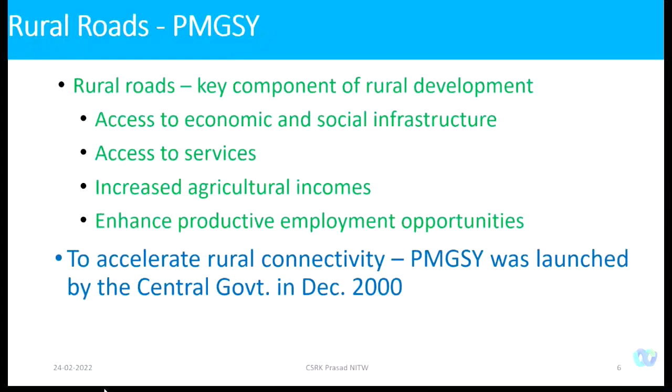They realized that if you want to develop the nation, you want to develop the rural areas or habitations where 70% of the population still live, then it's worth investing - economically, financially, or socially - in construction or strengthening of rural infrastructure. Roads are the primary infrastructure providing accessibility, connectivity, and mobility to people living in these rural areas. That is the reason they launched this scheme, PMGSY, Pradhan Mantri Gram Sadak Yojana, in December 2000, thanks to our late Prime Minister Sri Atal Bihari Vajpayee - it is his brainchild who launched this one. We are enjoying the fruits even after 22 years of launching this particular program.

This PMGSY program is focused on providing a proper engineering structure, because till 2000, even though rural roads were supposed to be an engineering structure, they were never treated as one. So as and when funds were available, small or fractional funds, they used to lay one layer of metal or gravel, and sometimes roll it, sometimes not. That was the fate of the village roads.

So they realized that the PMGSY has emphasized that rural roads are also civil engineering structures, which are supposed to be scientifically designed, and then constructed and maintained properly. So they also stress the quality and durability of these roads. The quality of construction should be good. That is much emphasized.

Probably you might realize that by this time, the three-tier quality control and assurance mechanism was not there in the other schemes of either the state or central governments. It's the first time under the PMGSY scheme that they introduced an excellent quality framework, that is a three-tier quality framework. All of you are familiar with that.

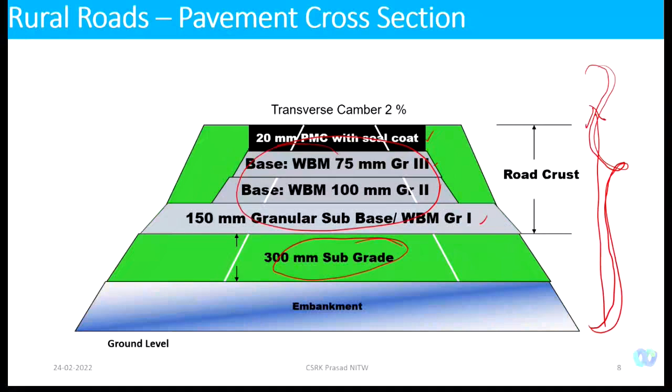You know that the Government of India has launched a scheme to provide a house for every citizen across the nation, villages, towns, etc. I think our Modi ji has said that by 2022 we want to have a house for each citizen. We have not yet realized this. Not only that, there are several construction and infrastructure projects where natural resources are required in huge quantity. Similarly, high volume roads, yes, we require them.

But can we find out alternative materials? Can we find alternative materials replacing aggregate, so that the dependency on good quality material will be reduced, along with the cost of construction?

I vaguely remember in 2001, when we were scrutinizing the DPRs in the first phase, first year of the launch of this particular program, it was roughly around 5 lakhs per kilometer, less than that. But now it's almost 80 lakhs, 1 crore, or in some states it's crossed more than 1 crore per kilometer. Cost of construction has become almost 20 times higher in 20 years. So where do you get the money?

Ours is a developing country. It's not cash rich or with excess surplus budget. So we have a huge demand across various sectors. We have to optimally utilize the resources available, and we should be able to reduce the cost of construction.

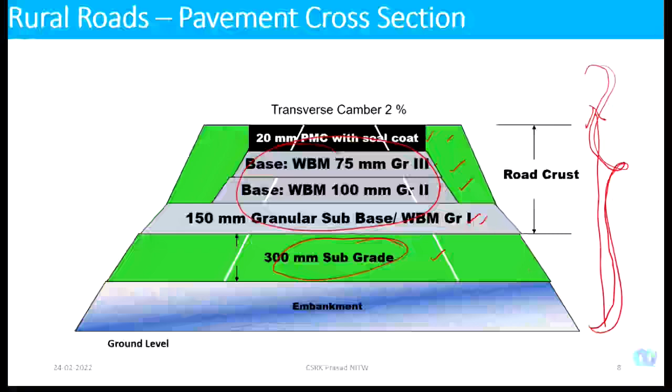In the subgrade, or the subbase course, or the WBM layers, or on the surface layers. So we have to test and evaluate each and every naturally available material or industrial byproduct, and assess whether they are suitable for the layers in which they can be adopted or implemented, so that multiple purposes are served. What are the purposes? One, the cost of construction comes down, saving natural aggregate or natural resources for future generations, and effectively utilizing the industrial byproducts. Otherwise, disposal is a big problem.

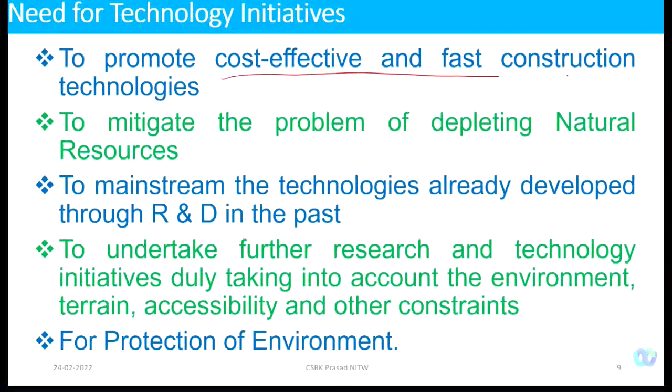So these are the multiple objectives with which this particular scheme was launched, encouraging the usage of new technologies, promoting cost-effective and fast construction technologies, and mitigating the problem of depleting natural resources. And then mainstreaming the technologies already developed through R&D labs like CRRI, CSIR labs, IITs, and NRRDA and so on, to undertake further research and technology initiatives, taking into account the environment, terrain, accessibility, and other constraints. India is a beautiful country.

From north to south, if you look at all our states and union territories, you have different terrain conditions, different environmental conditions, different cultures and customs. So we need to look at different local available materials, which are specific to a particular geographical location.

And ultimately, we have to protect the environment. You see in the last 20, 30 years how we have spoiled the environment. We, meaning I and you, all of us, are the main reasons for the depletion of the environment because of man-made activities, whether it's construction, traffic, vehicle manufacturing, or thermal power.

We are not in a position to drink tap water. We are not able to breathe properly. All our urban areas are being polluted. Two-thirds of the pollution in urban areas is due to traffic pollution. So there are several health hazards, whether it's high blood pressure, hypertension, diabetes, or even cancer. All these are due to pollution.

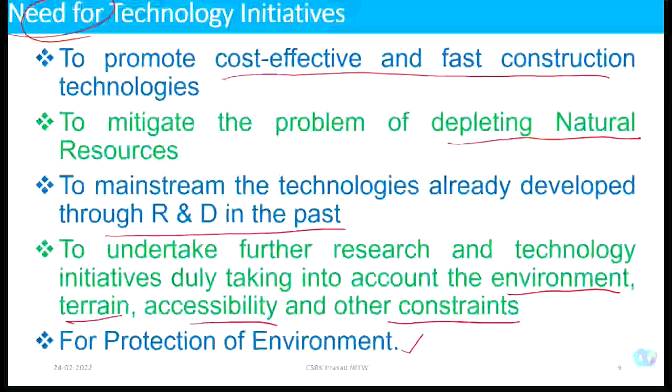So we need to look at reducing our contribution to air pollution drastically. These are all the reasons for us to adopt or look towards the adoption of new technologies. Now, if you want to use new technologies, what are the issues?

What are the issues in the use of new technologies? Maybe all these issues were more pertinent about 10 years back, but even then they are relevant even today to a certain degree, like the fear of failure of new technology and accountability. Many of our engineering friends working in the field are worried whether the new technology is a proven technology. It's not being applied, implemented, and its performance has not been evaluated. It's not well documented.

So if it fails, fellow engineers may say that his road has failed. And the seniors, the higher-ups, may also think that this fellow has not constructed the road properly. So this kind of social stigma will be there.

Then there are apprehensions among officers about rate analysis. This is another issue, though now slowly all states are trying to address it. Whenever we suggest engineers adopt new technology, they say that the standard unit rates are not available in SSRs. So slowly we are trying to address this unit rate analysis in the SSR across different states.

Similarly, there is inadequate technical know-how about various technologies. The know-how was not well disseminated about 10 years back. Now we are well versed. Several series of workshops are being organized by the technology providers as well as by NRIDA. I've seen that in the last 10 years, more workshops are being conducted to disseminate the knowledge.

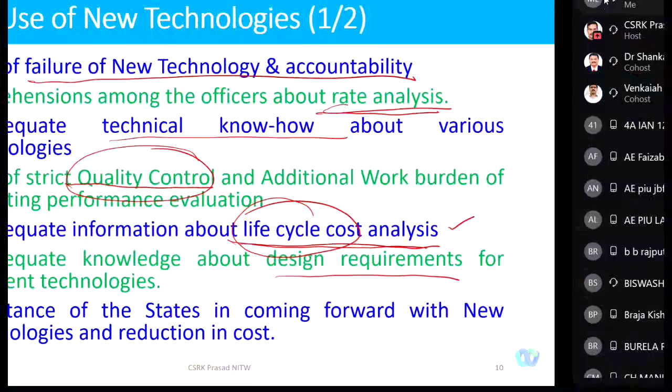One of my professors, Professor Ramamurthy, is going to address you tomorrow. He will say that we have to take about 70% of the performance in the laboratory may be reflected in the field. So what is that scaling factor?

For that, the technology providers should be able to share this information. In fact, as STAs and PTAs, many friends like me, my colleagues across the nation, are trying to convince the technology providers to share these design parameters. We're also finding it difficult.

Sometimes they're open and trying to share, sometimes they will try to shield the information. Okay, things are improving though. The reluctance of the states in coming forward with new technologies and reduction in cost is another issue.

The cost of road - I could see a rat race among our fellow engineers. If I say that as in charge of some X road, my cost of construction is about 50 lakhs per kilometer, the other colleague in the next division will also try to see that the cost estimation will be roughly around 50 lakhs per kilometer.

But that road may require only 30 lakhs. That road's soil subgrade might be good - you don't require that thickness, reduced thickness is good enough. And his road might not have a number of cross drainage structures. In my road, what I propose, there might be 3 or 4 cross drainage structures per kilometer, while in his road there might be just 1.

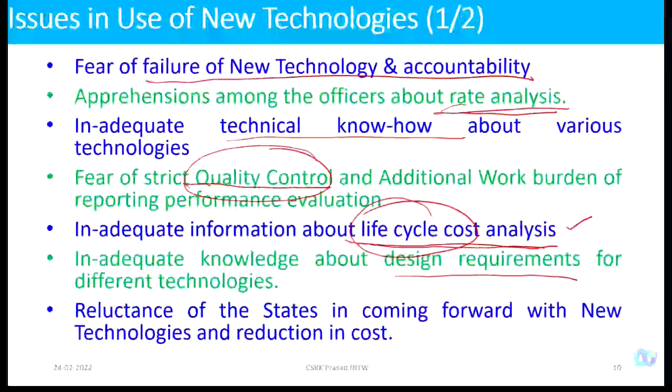In the name of new technologies, providers will try to enhance the cost of construction, and there's a claim about non-availability of standards and specifications for construction. But this is not true. In many cases, like proven technologies such as lime stabilization and cement stabilization, there is a well-established code of practice, which we will see subsequently. But for some technologies, yes, standards and specifications are not available. That's where our fraternity is trying to develop the specifications.

Lack of awareness by contractors is another issue we face in our country. Some of them are not professionals. You could see professional contractors on high volume roads, but these are all low volume roads, where the tendering value might be around 40, 50, 60 lakhs. You're unable to attract professional contractors. The less we speak, the better we understand the type of contractors we get for low volume road construction. Many times they don't know the ABC of construction. So we need to attract and upgrade the knowledge of these people.

Non-availability of indigenous equipment is another issue. Now slowly you can see agriculture tractors being effectively utilized in the construction of low volume roads, for pulverizing the soil, stabilization, mixing, etc. But the equipment problem, especially compaction, arises when widening roads from 3.75 meters to 5.5 meters intermediate lane, that's 1 meter on either side, developing a layer from subgrade level to surface level. That's where people face difficulties with compaction equipment, rollers, etc. Though now I've seen some smaller rollers in the market.

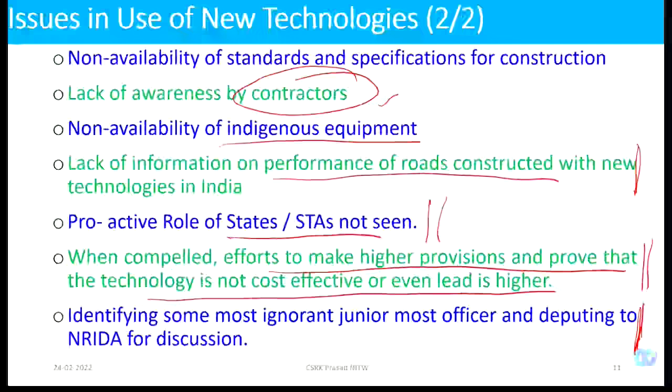When compelled, efforts are made to inflate provisions and prove that the technology is not cost effective, even when the lead is higher. This happens in very few cases, not all, maybe one or two. Then there's the practice of identifying some junior, less informed officer and deputing them to NRIDA for discussion. This is a point raised by NRIDA specifically, that for new technologies, the proper responsible officers are not being deputed. That's what they felt.

Having said that, with that background, what are the technologies we should focus on? The immediate focus is available marginal materials. There are several marginal materials across the nation in different states, and they are not one and the same. The marginal materials available here and there need not be the same. AP might have some kind of material, Telangana something else, Tamil Nadu, UP, different states have different types of marginal materials. Can we use them? Otherwise they are waste material. Can you use them?

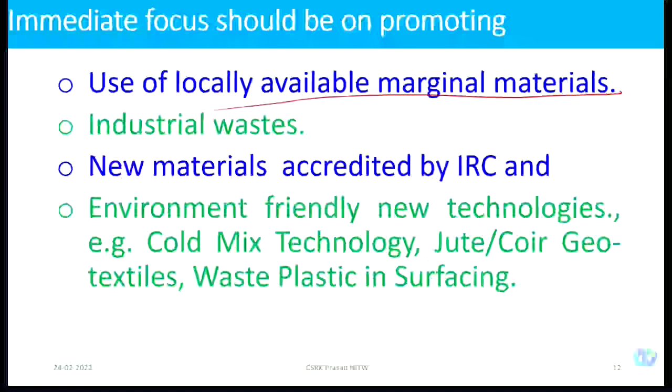Maybe can you use it as a subgrade, or by treating these marginal materials, can I improve the bearing strength and hence use it as a sub-base course? That's what we ought to look into. That's the reason civil engineers are a nature-friendly engineering discipline, because we want to adopt all types of materials and test their suitability. You cannot neglect or reject the materials; we have to find out where they can be used. Can I use it as a subgrade, sub-base course, or base course? By proper treatment, of course. The treatment might be necessary. With little intervention, probably you can enhance their qualities.

So the first priority is to utilize the marginal material so that you can save its quantity more. Then an equal quantity of aggregate or sub-base, other good soils that would be borrowed, can be avoided. Then there's industrial waste—thermal power plants, steel plants have a lot of byproducts in the name of fly ash, blast furnace slag, etc. Can I use them as construction material? Fly ash can be used in embankments, so that costly soil need not be borrowed from elsewhere. Or it can be used with cement, so that you don't lose strength characteristics and durability will increase, etc. These are similar new materials accredited by the IRC.

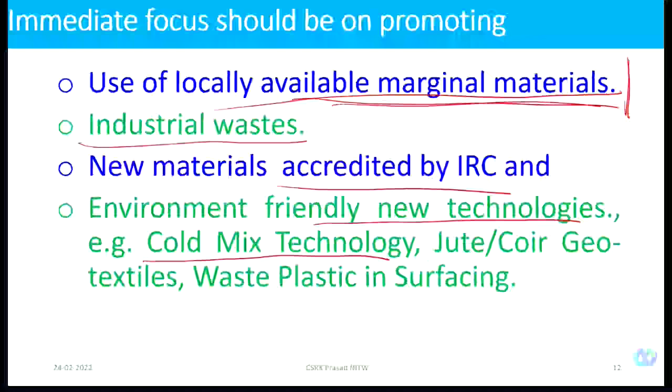So these are all our concerns—these are the ways you can focus on and adopt these technologies. These alternative materials can be broadly categorized, like an academic exercise: manufactured materials like cement and fibers, natural materials like coir and jute, waste materials like crumb rubber and waste plastic which can modify the properties of bitumen and improve the durability of bituminous mixes, and then industrial byproducts like fly ash and slag, which can also be utilized.

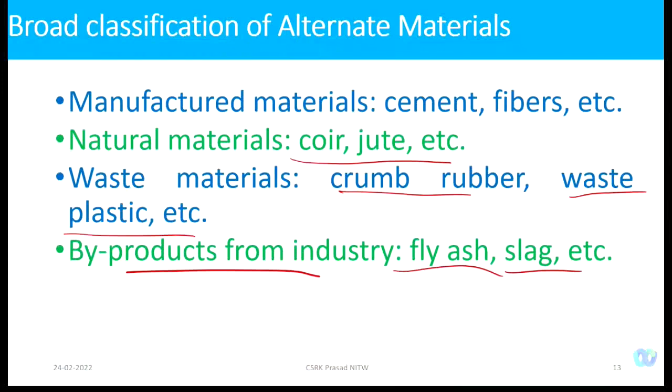Now let's try to look at some of the technologies which can be mainstream as suggested by NRIDA. It's a document. There are several proven technologies beyond doubt, whose performance has been evaluated, specifications are drafted, and codes of practices are being developed.

We call them proven technologies with Indian Roads Congress codes of practices or specifications. Like soil stabilization - lime stabilization, they have a good code of practice. Cement stabilization, bitumen stabilization, and mechanical stabilization. These stabilizations can be adopted in the field without any hesitation or doubt, because these technologies are already proven. How to use it, where to use it - step-by-step procedures to stabilize the soil or surface layers, whether using lime or cement.

All these things are well documented through the guidelines, codes of practices, or specification books like IRC. So these technologies, without any hesitation, all our engineering friends can use. There is nothing like failure of the road, nothing like failure of a particular layer where we are stabilizing it, because these are proven beyond doubt.

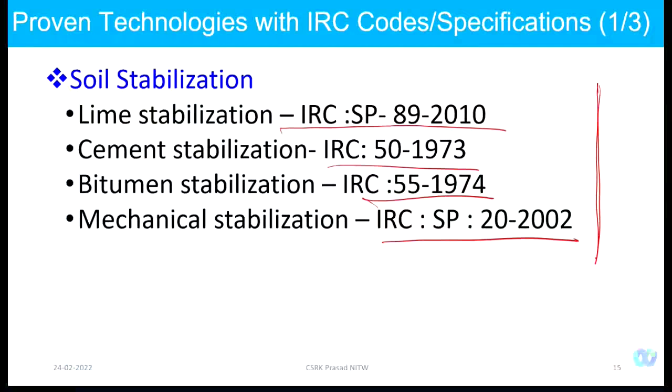They were tested in laboratory, they were tested in the field - they are proven technologies, and can be adopted by each and every one of you. Only thing is you have to go through the code books, and we have individual topics on each of these technologies in the subsequent classes. Tomorrow morning, 9 to 10:30, we are going to have an exclusive topic on stabilization.

Then other proven technologies are the use of fly ash and pond ash. Fly ash is a waste byproduct from thermal power plants, so they can be used in road embankments as a filler. They can be used in cement concrete, so they have codes of practice - IRC SP 58, and similarly IRC 112, 2020, which is recently updated.

And then roller compacted concrete pavements - there is again a code of practice. Interlocking concrete block pavements - we have another code of practice. Cold mix technologies, waste plastic utilization - NRIDA has given guidelines.

This document can be downloaded freely. Even the IRC codes of practice - all IRC codes of practice are now available free of cost. I could see in 2000, 2005, 2010, 2015, a lot of people claiming that the codes of practice are not available.

In fact, that responsibility has been taken up by NRIDA - we have to thank them. They have procured relevant codes of practices applicable for the low volume roads, even IRC SP 20, and supplied them to each and every state. I could see these books are available in the CE's office. When I visited some of the CE's offices, I could see these books are available.

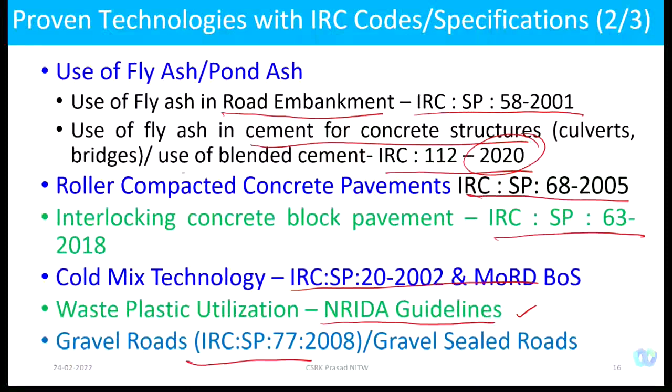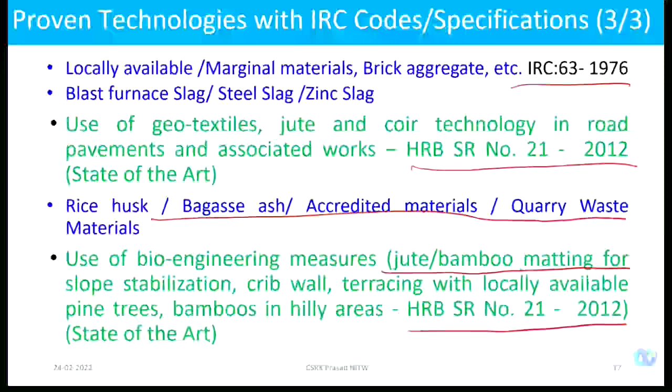Now let's try to understand a few basic concepts. I am not going to have an in-depth discussion about these various technologies. I will just introduce basic concepts, and then we will have detailed discussions in subsequent classes.

Like stabilization - what we are trying to do is make unstable soil stable. What is stability? What is instability? Unstable soil is one which is unable to take load. What are the loads? Axle loads, traffic loads. Vehicles moving on the road have huge axle loads, even standard axle loads of 8 tons. Now you could see axle loads of 10, 15, 20 tons with dual axles. So you have huge axle loads applied on the road repeatedly at different time intervals. During its lifetime, hundreds and thousands of vehicles move on it. Under such load applications, if the soil is unstable, unable to take load, it fails in shear and shows excessive volume change - then you call it unstable soil.

If you want to make it stable, you want to improve the bearing strength of the soil subgrade, and also the bearing strength of the subbase course. There are different ways - both physical and chemical alteration of soil properties. Physical alteration is nothing but mechanical stabilization. Chemical alteration of soil properties is lime or cement stabilization, etc. So these technologies are available to treat different subgrade materials.

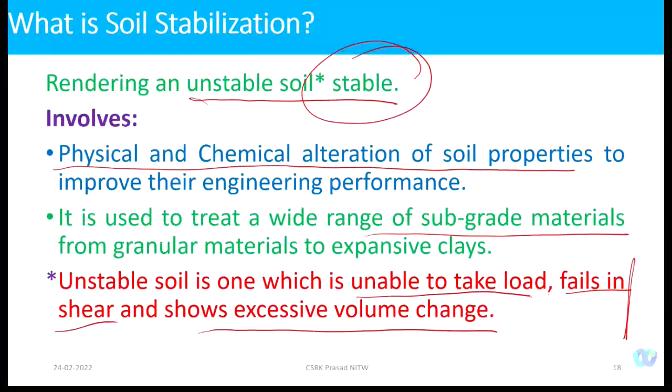About 30% of soil in India is black cotton soil. It might be good for agriculture, but it's a poor construction material. So to increase the strength, thereby increasing the stability of slopes and embankments, we need to have stability of slope, improving the load carrying capacity of the subgrade.

The PMGSY guidance now says you should have a minimum of 5% CBR. When the scheme was launched, there was no such restriction. The IRC, in IRC 37, says that if the CBR value of the soil subgrade is less than 2%, you should have some capping layer, a drainage layer, around 150mm, and then over that. But initially PMGSY accepted that. Subsequently, they said the minimum CBR of the soil subgrade should be 3%.

Now they have made it 5%. See, in 20 years, we are trying to improve the standards, because we have realized and experienced that if the soil subgrade is poor, the cost of construction of the road goes up, and performance of the road is not up to the mark. So now we have identified the problem, and subgrade CBR value has been improved to a minimum of 5%.

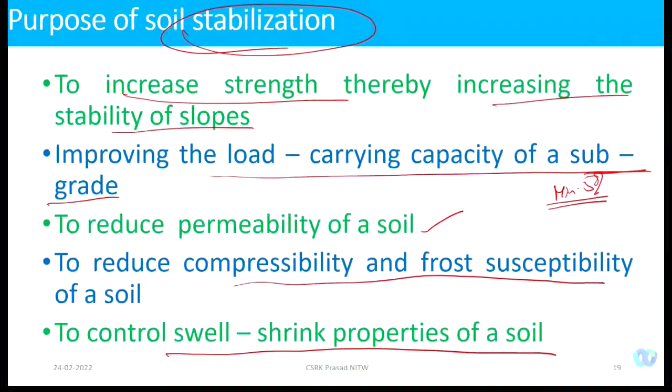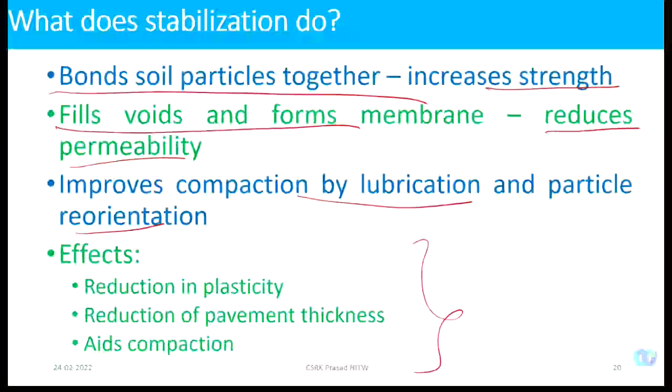In the process of stabilization, the soil particles are bonded together, and hence the strength is increased. It fills voids, reducing the permeability, and improves compaction by lubrication and particle reorientation, etc. So the benefits are reduction in plasticity, reduction of pavement thickness, and aid to compaction.

So what are the soils where you can apply lime stabilization? It is most effective in soils possessing cohesion, like clay gravel and gravel binder mixes. You need to identify that also. You should know where you can apply lime stabilization, when you can apply cement stabilization, when you can adopt cement or lime for stabilization, or when you can go for mechanical stabilization, or bitumen stabilization. This we need to understand.

That is the reason why I said that a civil engineer is a nature-friendly engineer. He has that ability to identify the suitability. All of us should have that ability to identify the suitability of the material, where they can apply, or what is the appropriate location. Similarly, you have the codes of practice now. It's not rocket science, right?

Now, what are the types of soils where you can apply lime for stabilization? As said, soils possessing cohesion like clay gravel or gravel binder mixes. The minimum clay content is also specified, at 20%. So soil passing 75 microns should be less than 35%, and plasticity should be more than 10%.

In sandy soils and silty and loamy soils of low plasticity, lime alone is not enough. It is also said that in these cases, lime alone does not work well. So you need something else, maybe cement, which you have to add.

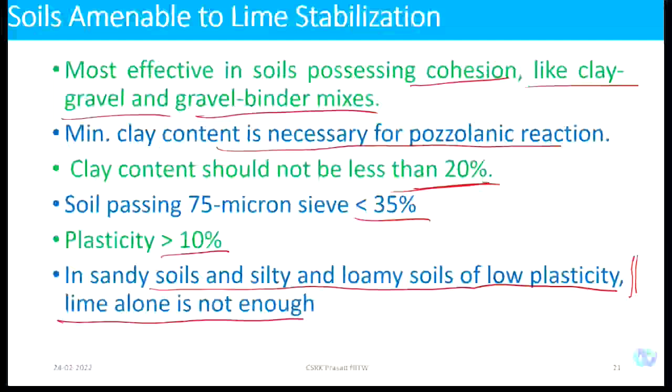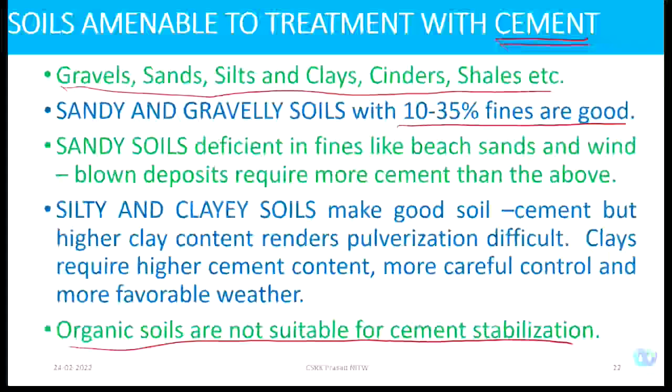For cement stabilization, gravel, sand, silts, clays, cinders, etc. are useful. Sand and gravel soils with 10 to 35% fines are good for cement stabilization. Similarly, organic soils are not suitable for cement stabilization. So you need to identify the type of soil, carry out particle size analysis and all the properties, and then judge what type of stabilization is good.

Rice husk ash is available where rice is the predominant crop. This is a waste product, right? It has some kind of silica with high specific surface area, and hence it can be used as an additive.

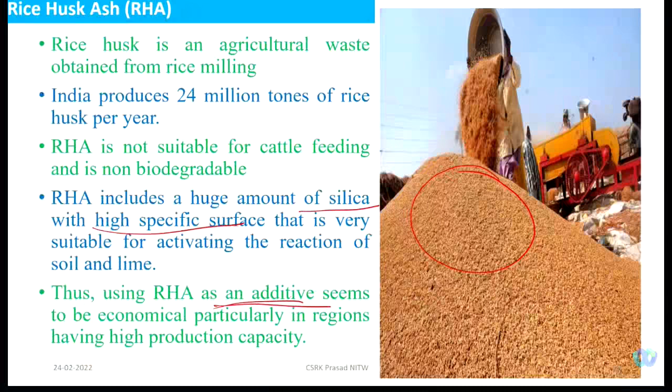Similarly, bagasse ash, wherever sugarcane cropping is predominant. This is nothing but the waste of sugar manufacture, the solid waste material known as bagasse. It is also a pozzolanic material which can be used for stabilization, etc.

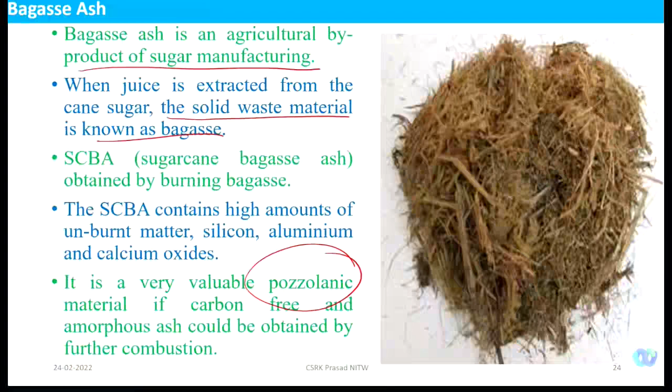As I said in the initial slides, these agricultural wastes are plentiful, abundantly available in almost all the villages. Now the agriculture tractor is a basic tool, and this can be used in the stabilization of soil with a little accessories.

Now there are locally available materials. What is the need? The availability of quality aggregates is becoming a serious bottleneck, because these aggregates are depleting in quantity. This is because we have several road development programs. Even the recent budget said they want to construct 25,000 kilometers of national highways in the next one year. There is a huge project, Bharatmala, right, giving connectivity and road infrastructure. They have allocated a few lakhs of crores of rupees. The focus is on infrastructure development in the recent budget.

Strengthening the ports, the railway lines, the road network - all of this requires a huge quantity of natural materials like aggregate. The way we are using these natural resources, maybe 5 or 10 years down the line, this aggregate may disappear, may not be available. And what will happen to our future generations?

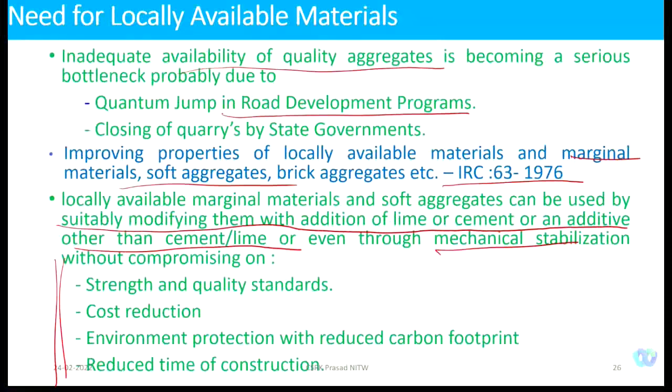But these locally available materials may not be suitable for direct usage, so we have to treat them and improve their properties. There is a code of practice for this. There are several marginal materials like soft aggregates and so on, which can be used by suitably modifying them with addition of lime, cement, or other additives, or even through mechanical stabilization. What you are modifying is meant to improve the strength and quality standards while reducing cost. Using these materials reduces cost, saves money, and also protects the environment.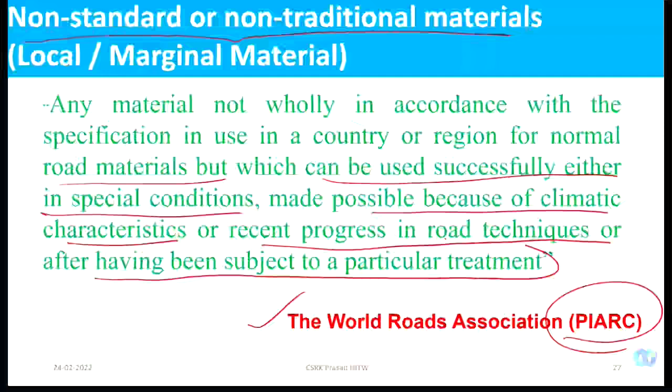Now there is a standard terminology for these marginal materials. In some countries they call them non-standard or non-traditional materials; in India we call them local or marginal materials. The World Roads Association, PIARC, located in Paris, defined them as any material not wholly in accordance with the specification in use in a country or region for normal road materials, which can be used successfully either in special conditions made possible by climatic characteristics, or through recent progress in road techniques, or after being subjected to particular treatment.

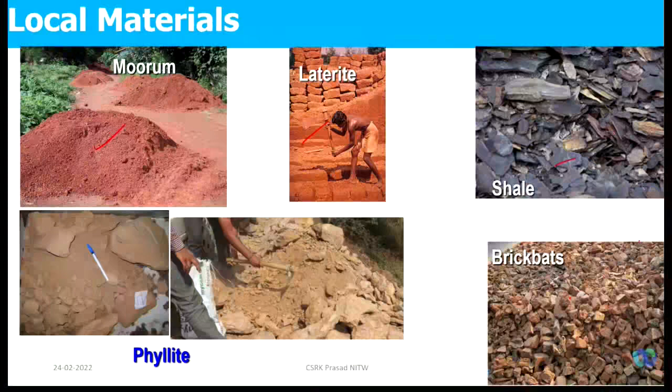There are several such materials like moorum, laterite, shale, brickbats, and so on. These local materials have been scientifically categorized into 5 groups: hard rocks, weak rocks, natural gravels, duricrusts, manufactured materials, and so on.

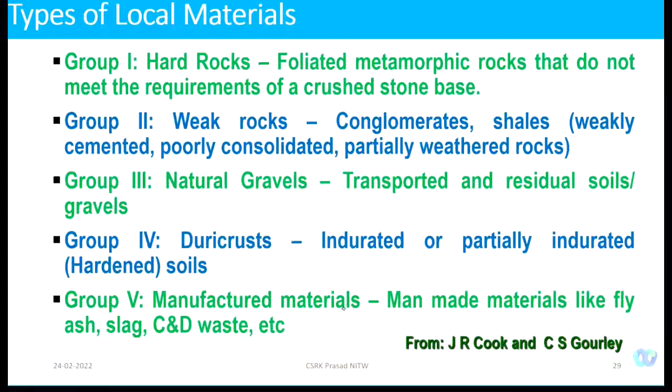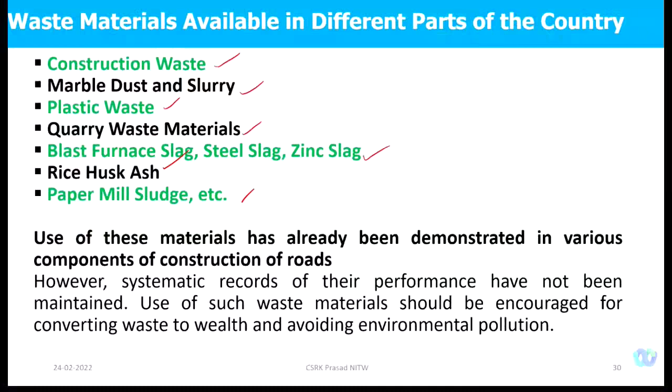There are also materials like construction waste, which come under industrial waste or byproducts - construction waste, marble dust and slurry, plastic waste, quarry waste materials, blast furnace slag, steel slag, zinc slag, rice husk ash, paper mill sludge. These materials are abundantly available in large quantities, and you have to dump them, requiring huge space. Some of these materials are not environmentally friendly - they are not degradable, they do not mix and dissolve into soil, taking years together to dissolve and regenerate. So it's better to use them as construction material.

Construction and demolition waste is available in large quantities. In most cities, old buildings are being demolished and new buildings constructed, so large quantities of material are available. This can be used as a replacement for aggregate particles with slight, proper treatment, where the gradation can be analyzed to see whether mixing with other natural materials can achieve a suitable gradation for construction.

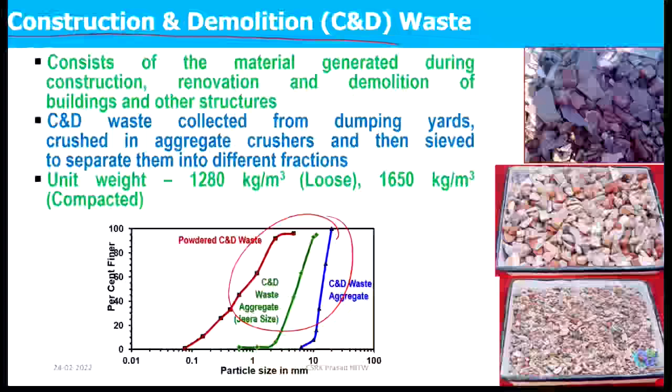Another byproduct is fly ash. The Government of India has given stipulations that within a 100 kilometer radius of thermal power stations, you have to use this material in infrastructure projects including roads. You can use it as a blended material for cement - blended cement is now coming up. IRC has also given a guideline saying a minimum cover of 60 centimeters on fly ash can be used in embankment filling for high volume roads, but for low volume roads, a 30 centimeter cover might be good enough. It's also used for stabilization of clay soils.

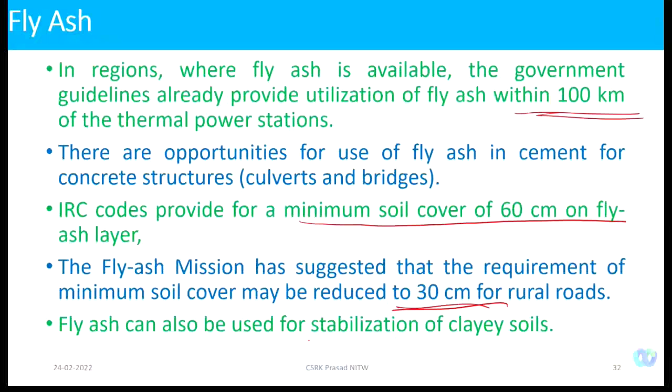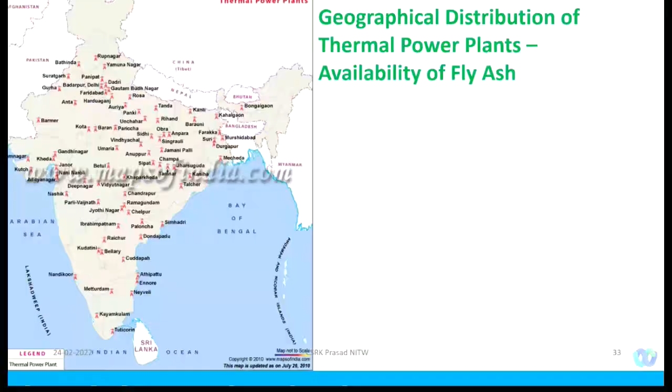There are several thermal power plants geographically distributed across the nation, so huge quantities of material are available, where bottom ash or pond ash can be used as embankment filler. There are also several integrated steel plants where steel slag is available in million tons per annum, and all this material can be used as subgrade, base course, or sub-base course depending upon their properties.

Several leading institutions like IITs, CSIR labs, CRRI, and NITs have tested materials. NIT Warangal tested the Visakhapatnam Steel Plant's blast furnace slag and found it suitable, recommending it for construction of internal roads. Several internal roads of the Visakhapatnam Steel Plant are being constructed using steel slag, used in the sub-base and base courses depending on suitability.

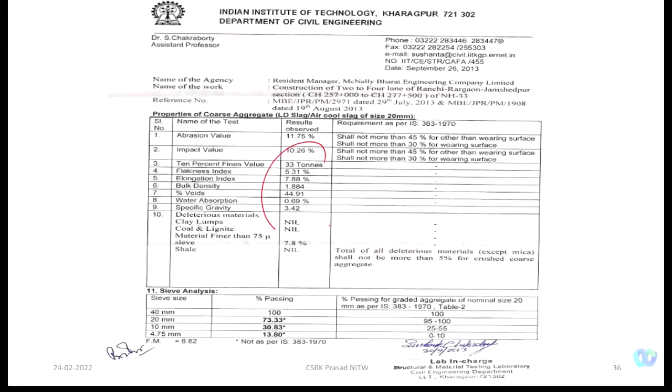You have to test all these materials to see whether they satisfy the required specifications. There are several tests, and of course blast furnace slag was tested. They found that they are all well within the limits of applicability for use either in the sub-base course or base courses.

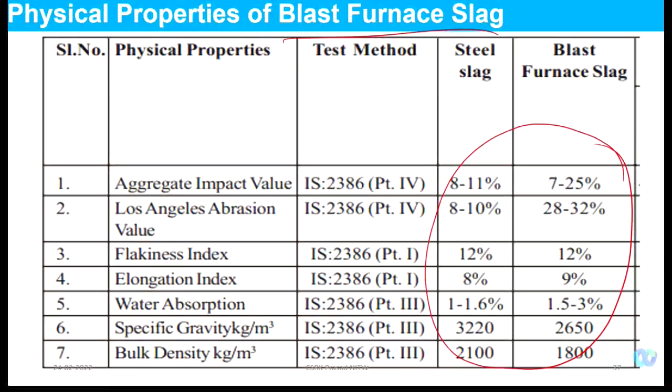Cold mix technology is another new emerging technology. As I said, using emulsions you can always mix the bitumen with the aggregate particles at normal environmental temperatures. This will completely avoid the heating of the aggregate and the bituminous materials.

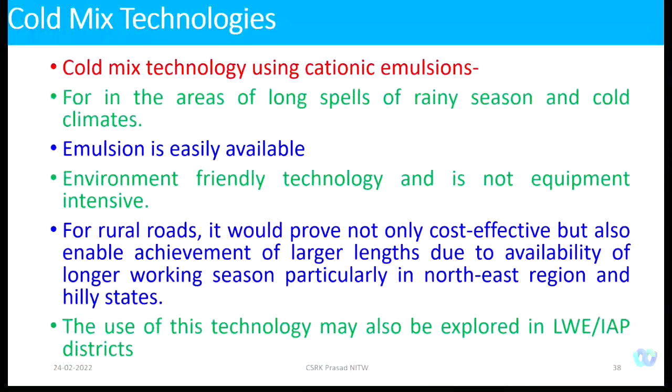The second problem is that rural roads are in remote areas. The length may be half a kilometer to 5 kilometers, maybe 6-7 kilometers. Other district roads may be about 7-8, 10, or 15 kilometers. But most roads, maybe 80%, are less than 5 kilometers, maybe 1 or 2 kilometers. If they are in remote areas, it's difficult to transport the hot mix, or plants might not be available close to these rural areas. That's another reason to adopt cold mix technologies in remote areas, especially forest areas.

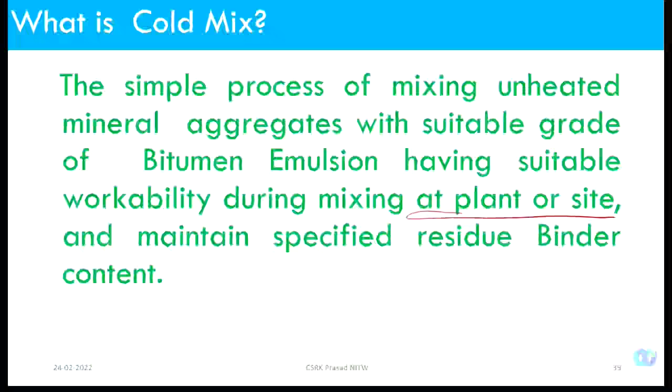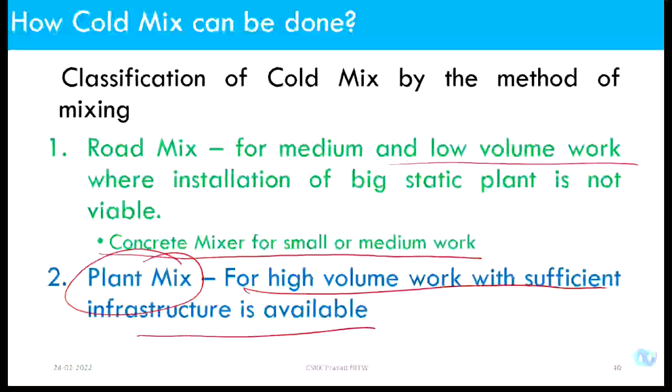The cold mix process is required because, as mentioned, plants might not be available, but the mix can be done at the site using a site mixer. Or if you have a nearby plant, it's called plant mix. Road mix is for low volume roads and works, similar to a concrete mixer for small and medium works. Whereas plant mix is available for high volume work where sufficient infrastructure exists. You can bundle a few projects together as a package, and if you require more and a plant is available, you can go for it.

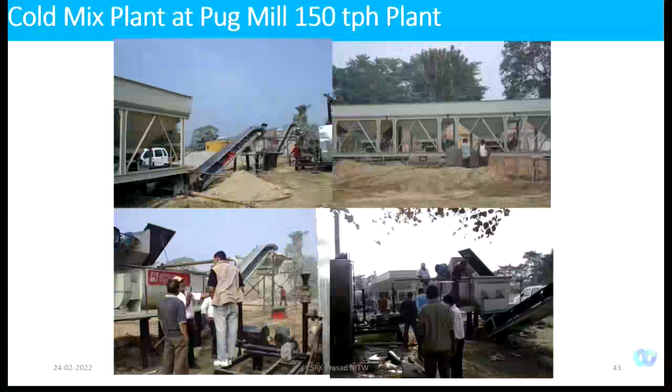These are the different steps involved in cold mix technologies, adopting the aggregate and mixing it like with a mixer used on the roadside. This slide indicates a plant mix process, showing the mix with slow setting characteristics, which can be spread and then utilized. You can see people using just slippers to move on it, though this is not advisable from a safety point of view.

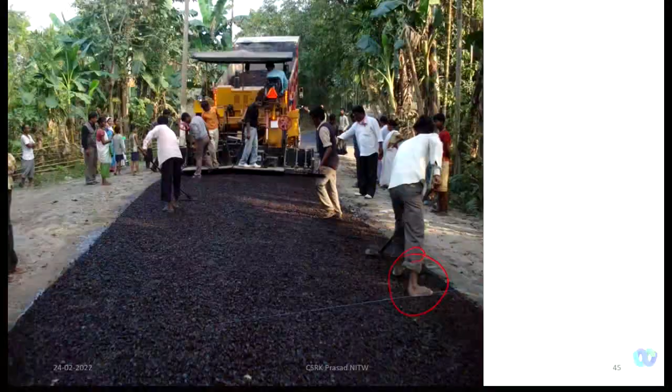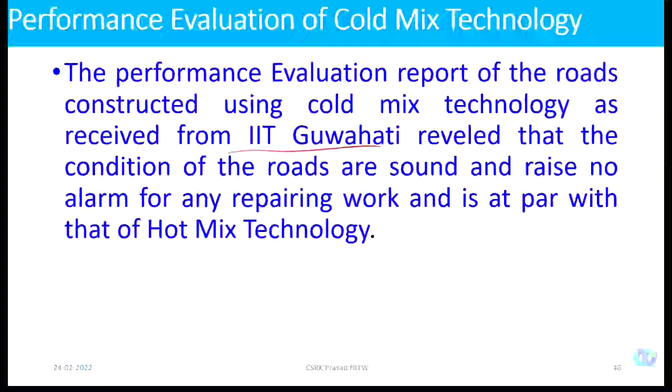This cold mix technology has been evaluated in laboratories and also in the field to a certain extent. Several institutions, including IIT Guwahati, CRRI, IIT Kharagpur, and NIT Warangal, have done this work and evaluated the performance. They found that the performance is on par with hot mix technologies.

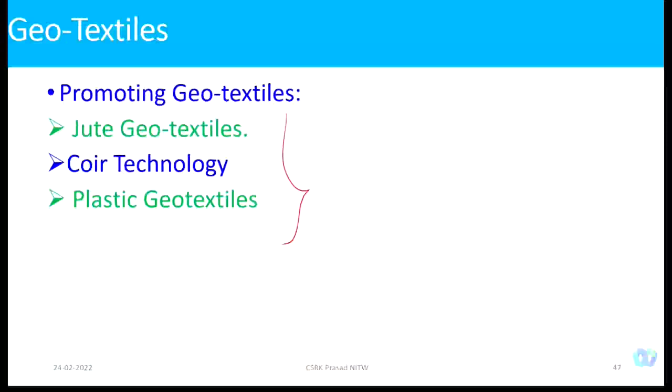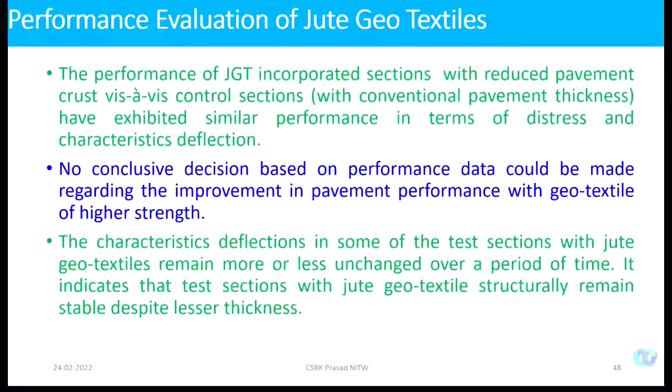Geotextiles have to be promoted, as I said, including jute, coir, and plastic geotextiles. There is extensive use of geotextiles especially in Tamil Nadu, Karnataka, and Kerala, where coir geotextiles are used extensively. In West Bengal, jute geotextiles are extensively used for improving or enhancing the bearing strength of the soil subgrade. These are plastic cells laid on the sub-base course.

Cell-filled concrete pavements are extensively used. This technology was promoted by IIT Kharagpur, Professor Pandey and his team, and they are being used extensively. They have transferred the technology and are willing to transfer it to various PWDs, whoever is willing to adopt it. This shows roller compacted concrete finishing.

Gravel roads are another option, as I was saying, since the majority of low volume roads, more than 50%, can be constructed with gravel. Looking at the USA or developed countries, low volume roads often mean gravel roads. You might have seen cowboy movies where the horse is running and red colored dust flies in the air—those are all gravel roads. That's how they're perceived.

But the Indian public is not in a position to accept these gravel roads because of the dust nuisance during summer and the mud slurry in the rainy season. So can we think of providing a sealing option for these gravel roads such that they can be used effectively? If you can provide that confidence, probably you can save a lot of money and material, aggregate particles, in the construction of roads.

In fact, NIT Warangal has a good, excellent experience. Dr. Venkaiah Chowdary, Shankar, etc. have constructed two roads near Warangal city. They provided a surface dressing on one road and an open graded premix surface on another, and evaluated the performance for 3 years. They found that the roads are doing well, performing well.

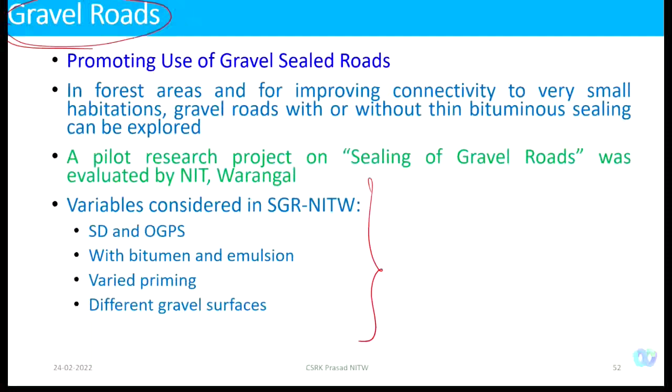So the government of India, NRIDA, is trying to map all these materials on the GIS platform. A couple of days back, the government of India, through the Minister of Rural Development, launched the platform GeoSadak. GeoSadak is the website launched by them, where they are trying to bring all the low volume roads together.

They said they have connected 10 lakh habitations. As per the government of India, there are about 6 lakh revenue villages - a group of habitations, clusters of habitations being considered as revenue villages. So they have identified 10 lakh habitations, and about, if I remember correctly, 25 lakh kilometers of low volume roads still going on.

They want to identify, geomap, georeference all the roads. They want to see the progress of construction and the performance of each and every road. They want to mark everything and bring it up on the open source GIS platform, making it useful and accessible for the public also.

So we can also map the materials available locally across the nation, so that the location, quantity of the material available, etc., we can look into that.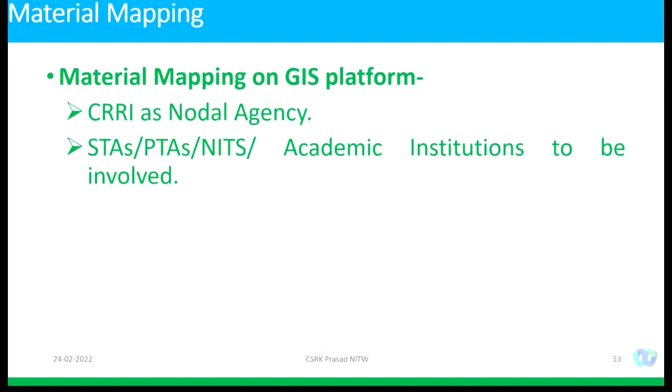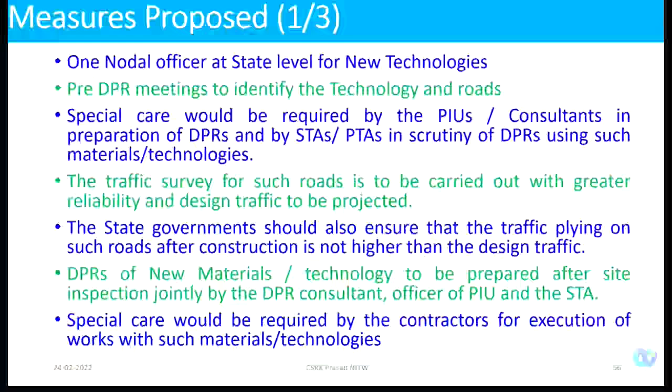There are some measures proposed by the NRIDA, that about 15% of the length of the annual proposal should be using new technologies. And also they have given certain guidelines on how to use, where to use, what are the measures to be adopted for the adoption of new technologies.

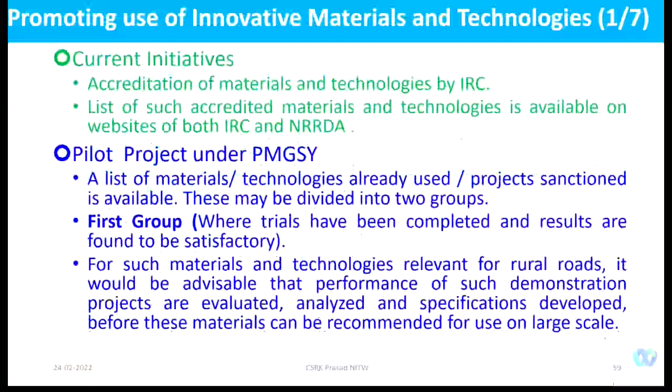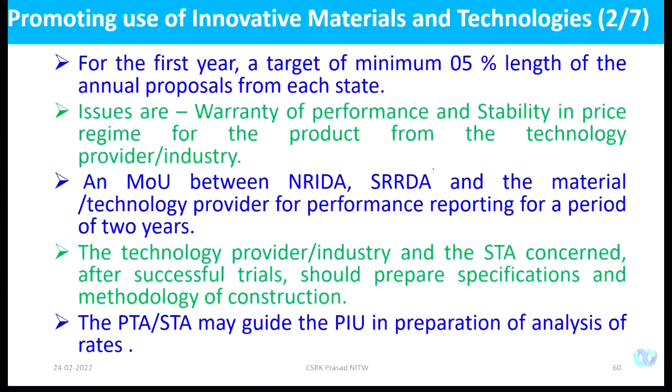Proven technology is one category, about 10%. 5% is the accreditation materials category. They have sent a mechanism like a technology provider, PIUs - and our SRRDA is the PIU, NRIDA, and also the STAs - they should come and work together.

How performance should be evaluated - they have given a procedure for the evaluation of these technologies, a well documented procedure. Even in yesterday's meeting, for the budget on several themes, the government of India is launching national webinars.

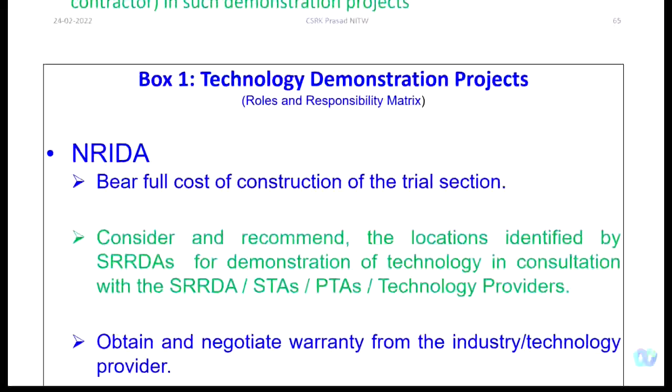Yesterday on rural roads also, a national seminar was conducted, where they said they are giving emphasis on new technologies, and also want to encourage institutions to take up research in the area of low volume roads to enhance durability, improve performance of these roads, and reduce the cost of construction through adoption of new technologies.

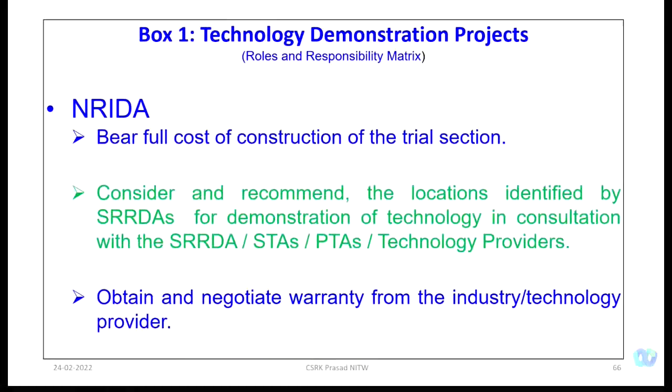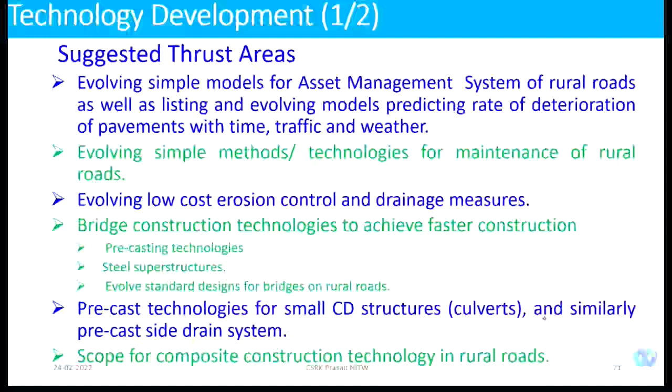These are some of the multiple objectives with which they are trying to encourage the technologies. Because these are all the procedures - the mechanism of STAs, PTAs, PIUs, technology providers - they should all come together to work in developing new technologies.

Of course, several manuals or handouts are being prepared by various institutions, technical persons, or experts involved. For dissemination, several workshops are being organized at the state level, national level, and regional level by the NRIDA, and they have also identified the training requirements.

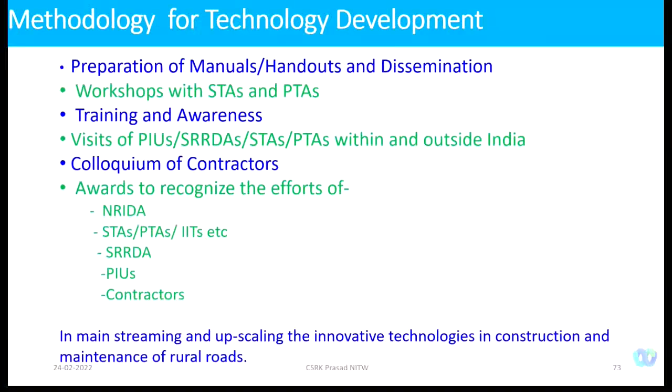That's the reason why you are here now. We are also here connected to conducting the training programs. This is one of the objectives - this training program is exclusively for enhancing and disseminating the new technologies.

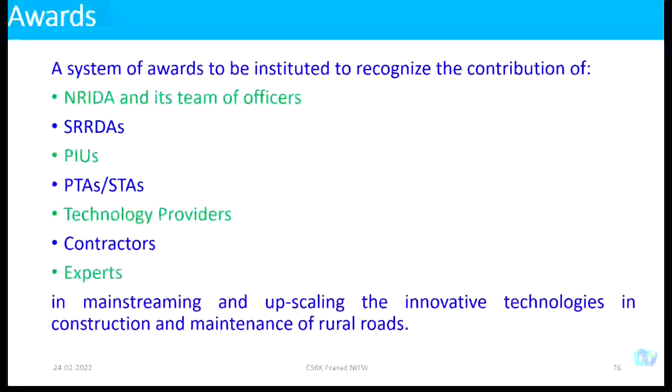Of course, we have also cited some kind of a rewarding system for all the people involved, all the field engineers, etc. - maybe an appreciation letter at the national level, which probably will go a long way to motivate the field engineers to adopt these technologies in road construction.

So these are all some of the technologies which are being already adopted across the country.